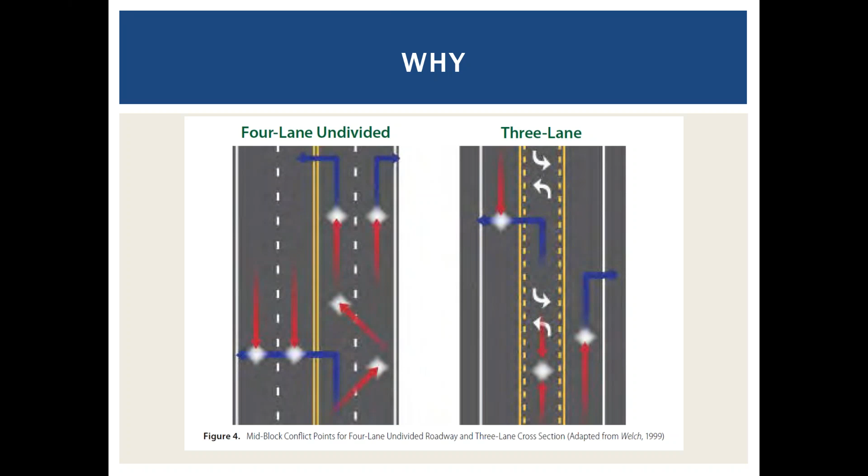The other thing about road diets from a vehicle perspective is that you have fewer conflicts at intersections — fewer conflict points, in fact twice as few, half as many as you have in the 4-lane configuration compared to the 3-lane. Before I get too far, I should note that much of the information I'm presenting today is from the November 2014 FHWA Road Diet Information Guide.

It's a new update, so if you've seen the older one, I'll be presenting some statistics, especially on collisions, that are pretty different than the prior version. Generally, the new guide has a more robust set of information about design practices and so forth. So I would recommend, if you haven't looked at that, it would be a good thing to get a copy of in your office.

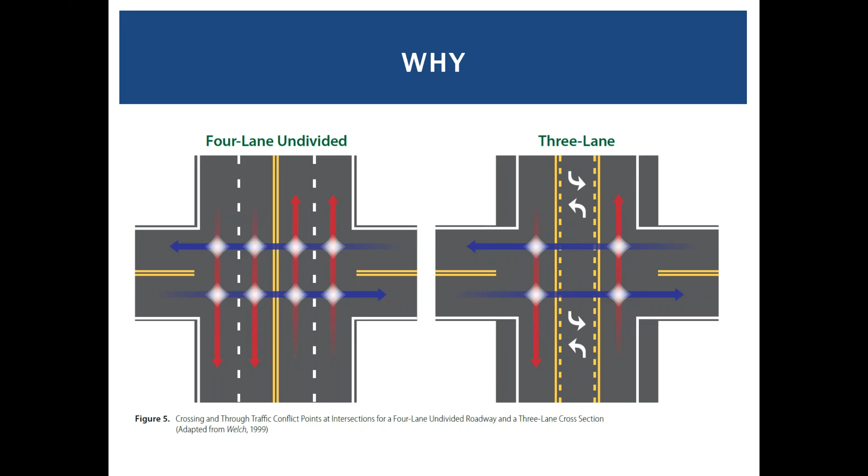Another safety consideration with road diets is being able to see how many vehicles are approaching. This is even more important when we talk about pedestrians, but the idea that if you're trying to make a left across two lanes, one vehicle may block your view of the other vehicle is important, and that is alleviated with the reduction of lanes from four to three.

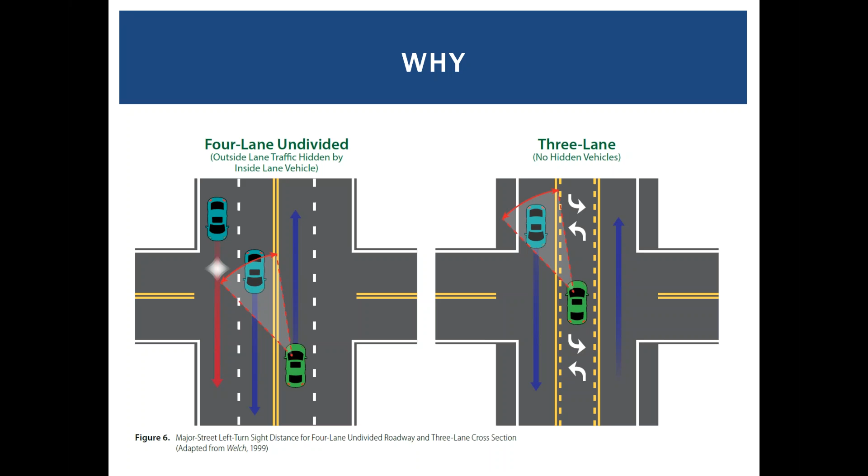From a pedestrian standpoint, I should note that most of the safety benefits you derive, at least in terms of reducing the number of collisions, are for automobiles. They're the ones that most benefit from the introduction of road diets. But pedestrians certainly do benefit as well.

One benefit is the reduction of multiple threats. As in the last slide, there was an instance where a vehicle trying to turn left is confronted with two vehicles. For pedestrians, it's even more dire because as you're crossing a street in an uncontrolled crosswalk, assuming the vehicle is supposed to yield to you, if the first vehicle yields, it often sets up a scenario where the second vehicle can't see through the first vehicle to see the pedestrian, and so it passes. Unfortunately this often results in a high-speed collision, so the risk of fatality is higher than in a typical pedestrian-vehicle collision. It's one of the most common types of collisions for pedestrians on four-lane undivided roads, and it's very much alleviated by converting from four-lane undivided to three lanes.

The other thing about introducing a three-lane road diet is that you can then introduce a median, shown in this figure. It's one of the few current crash modification factors contained in the Highway Safety Manual, which we'll talk about later, that relates to pedestrians so far, and it's pretty astounding the level of crash reduction you can get just from introducing a median refuge for pedestrians.

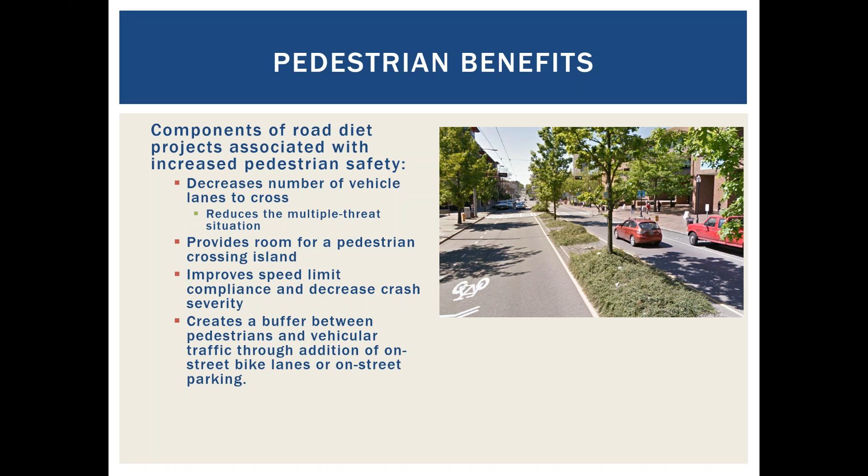Now I'll get into a case study of a specific road diet that I should divulge - I did not work on this one, but it is near and dear to my heart. It took place when I was practicing as a professional in San Francisco, but I didn't actually work on it. This is a road diet in San Francisco on a street called Valencia Street.

This was implemented in late 1998. At the time, MTA - the Municipal Transportation Agency of San Francisco, then known as the Department of Parking and Traffic - wasn't in favor of implementing this road diet. I think at present, given the cultural change in that organization, they would be very supportive. But you have to think back to 1998 in terms of the norm and expectations around moving automobiles. Anyway, the Board of Supervisors overrode MTA and said you will implement a road diet.

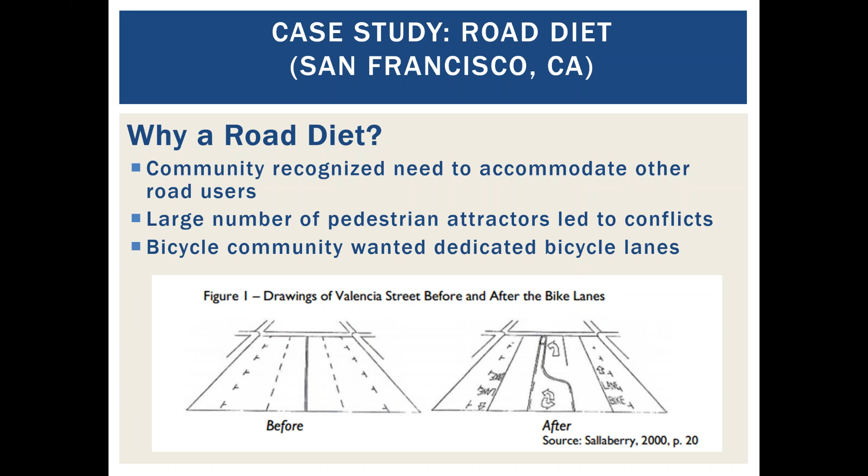So the city of San Francisco implemented a road diet on Valencia Street. A little bit about Valencia Street - when I was growing up, fairly near to it, it's in the Mission District. It was a tough district with a lot of gang violence. Over the decades since, it has transformed pretty dramatically, especially Valencia Street.

So where it was a tough place in the 70s, now it's probably the most heavily ridden from a bicycle perspective corridor in the city of San Francisco, with parklets, bike corrals, cafes, coffee shops, and tons of restaurants. It's transformed tremendously. Some of that transformation was already happening prior to implementation of the road diet, and that was part of the impetus for doing it. But much of that transformation was facilitated by the road diet and the fundamental change in character that the two-phase road diet project had on the city as a whole.

It's also important to note that it's a fairly high volume street, 22,000 vehicles per day, and there was some concern that those vehicles would divert to adjacent streets. I think it's a valid concern. The other thing about Valencia Street is it's both a bus route, and even back with the implementation of the bike lanes, it had fairly heavy bike traffic. It's now got extremely heavy bike traffic. It's fairly close to Mission, which is where two BART stations are located at 16th and 24th Street in San Francisco. So as a result of that and its commercial character, it has a lot of pedestrian activity as well.

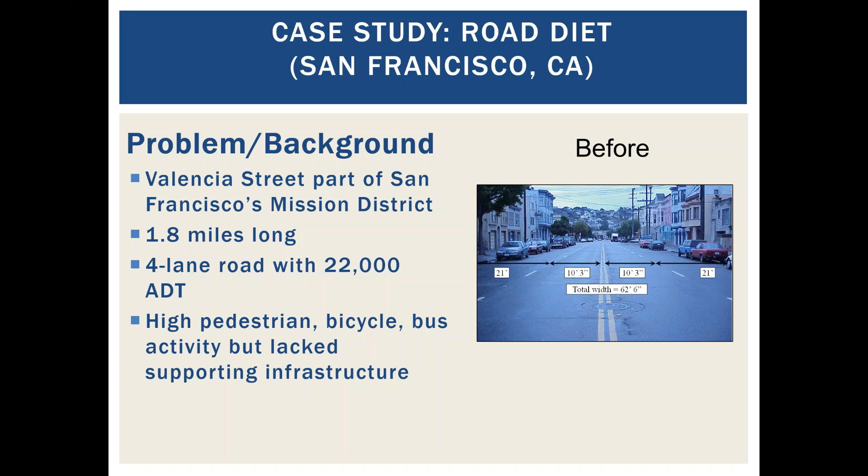Some of the key findings from Valencia Street: it was converted, actually in '99, from 4 lanes to 3. The speed limit was reposted as 25 miles an hour. Knowing MTA, I'm going to go out on a limb and say they probably didn't just automatically repost it. They probably did the road diet, did a speed survey, used that to justify reducing the speed limit, and then reposted it. They did modify the signal timing to try to get a smoother flow at 25 miles an hour. It was initially implemented as a temporary improvement. The result of that improvement, which is fairly low-cost, was $130,000 for almost 2 miles of roadway.

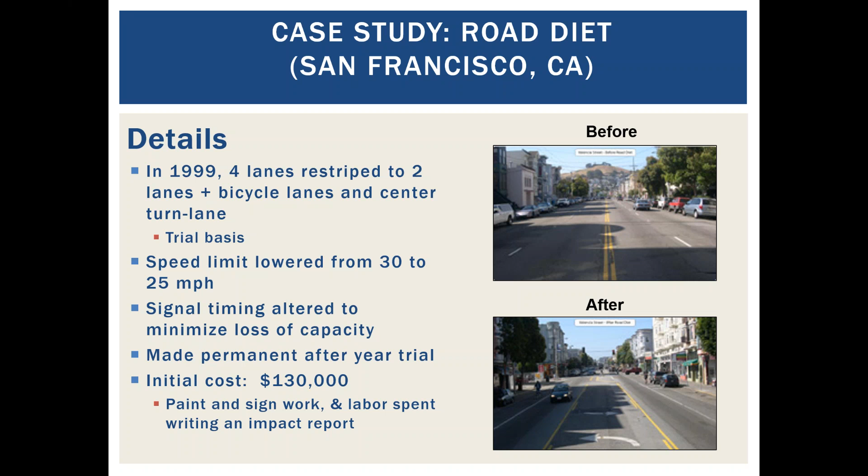The results of that improvement were eventually made permanent, mostly because some of the fears people had about traffic spilling over to adjacent streets just didn't happen, and the positive things that did happen on Valencia Street were also a big part of that. So the results showed really no change in ADT. The adjacent streets had some slight increase in traffic, but it was spread across so many parallel streets that it didn't really impact any of them. It's important to note that Valencia Street is part of a grid system. One of the real benefits of grid systems is you can spread traffic across multiple streets, so doing road diets within a grid system gives you a lot more flexibility than you might have in other street patterns where you don't have as much redundancy in the network.

It's a very significant increase in bicycle travel. Bicycle collisions also went up by about 50%, but that was outpaced by the 140% increase in the total number of people using the facility. A private citizen who was supportive of the project that Ken was running did some follow-up stated preference surveys with adjacent merchants and shoppers along the street, and found overwhelming support for it, with only a small marginal amount of people who would like to undo it. By and large, 65% were very positive, some were neutral, and a very small percent, 4%, were negative about the overall benefits of the project.

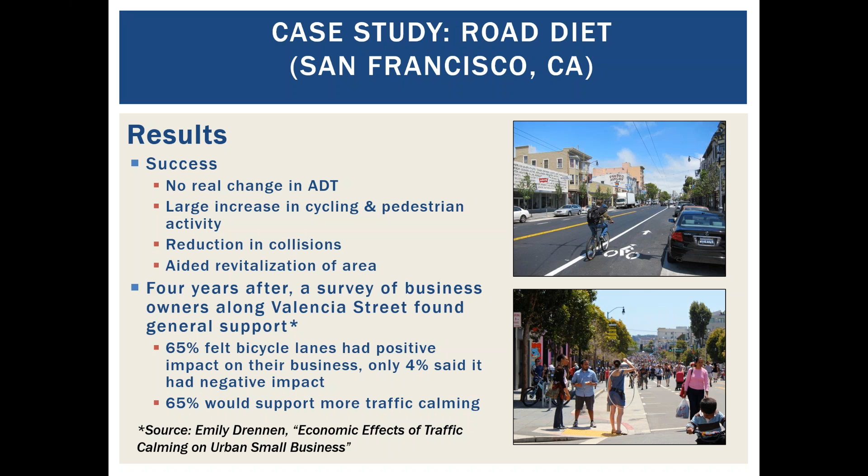As a result of that, the city went back and essentially said, well, that worked, it was really low cost, it's had a big transformative effect, what else could we do? So they looked at a host of improvements that were significantly higher in cost but also afforded additional economic benefit opportunities, and really, I think, were what was most transformative about Valencia Street. They widened the sidewalks, widened the bike lanes, implemented bike corrals and parklets, bulb-outs, increased the number of street trees and lighting, added public art. They also tried innovative stuff like the green wave, which times the signals along Valencia so that if you're going 13 miles an hour, you'll hit the green. It became a preferred route for cyclists traveling longer distances who wanted the signals in their favor. They also experimented with things like the bike bays shown on the right of this image.

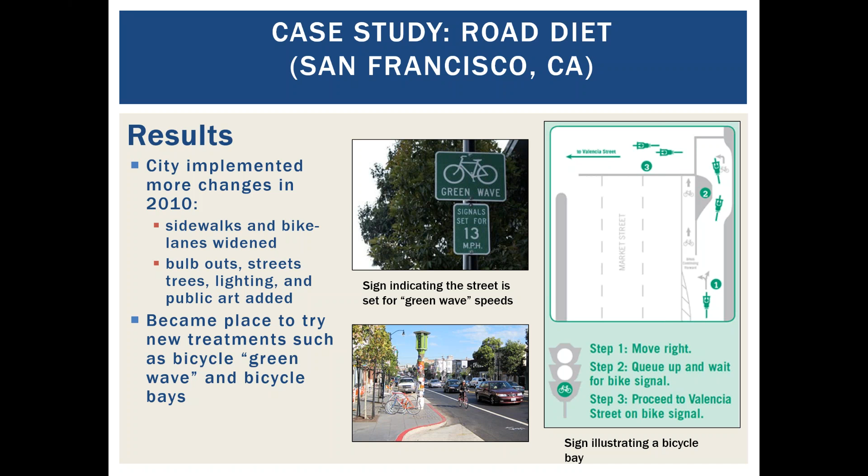So that's a successful case in San Francisco.

Now I'm going to get into some of the statistics presented on safety for road diets. It's important to note that the November 2014 edition of the road diet guide has significantly different statistics than the earlier version, partly because of a new statistical method for this type of analysis. I'm not a statistician, so I'll defer to someone else on the details, but the fundamental change has been conducting the safety analysis using the empirical Bayesian method.

In layman's terms, rather than doing a true before-after comparison, this method fits a series of collisions to a normal curve, then compares the before curve to the after curve as a better basis to estimate the overall statistical change in collisions resulting from the introduction. I'll be presenting a whole host of collision statistics in the next several slides.

It's important to note that the statistics presented up front are the more recent ones done with the empirical Bayesian method, which is considered the state of the practice. You'll see contradicting statistics in some later slides, largely because those were performed using a traditional before-after analysis.

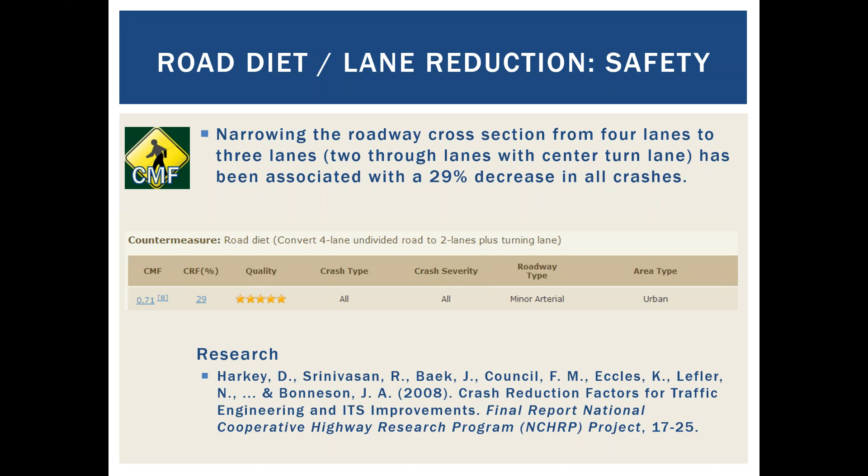The next one is an additional piece of research focused on urban areas. It has 3 stars, so not quite as statistically rigorous as the first, but not a significantly different set of results - a 37% decrease in crashes within urban areas.

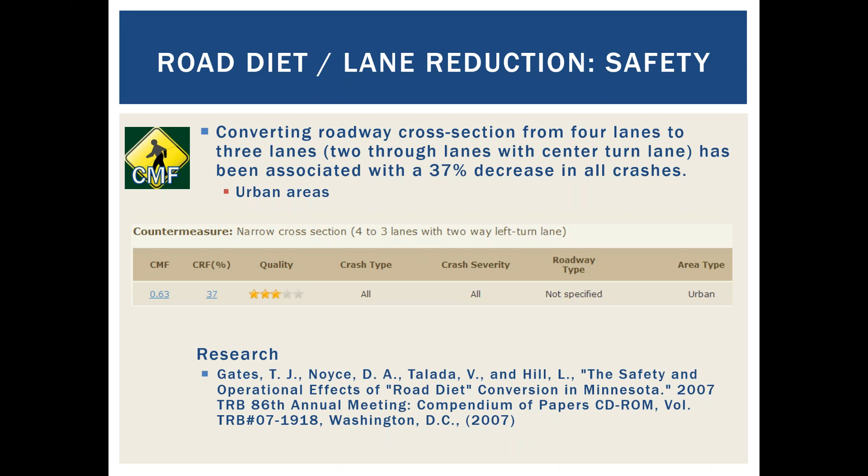The next one has a similar set of data, but for suburban areas. It's a 4-star piece of research, but you can see it's showing a pretty significantly larger decrease in collisions.

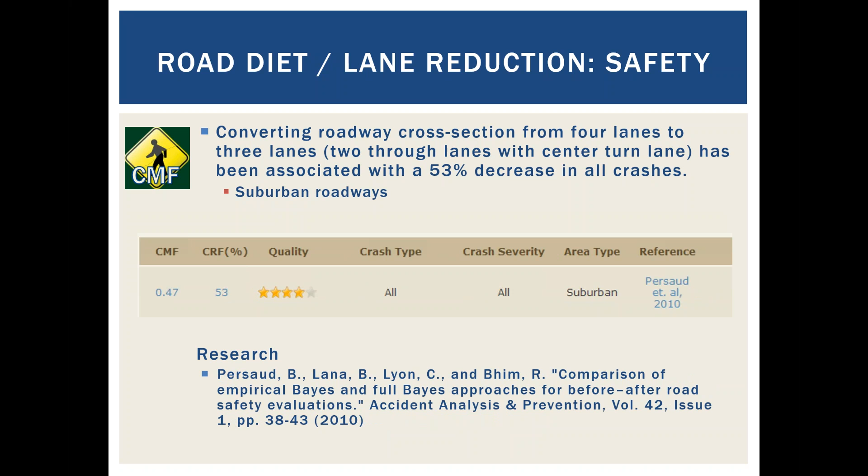I think one of the things you should look at if you're considering a road diet is to look into the details, especially of these three studies, to figure out where your particular road diet example would fit on a typology basis. You may be able to refine your estimates of what collision reductions could result from implementation of a road diet.

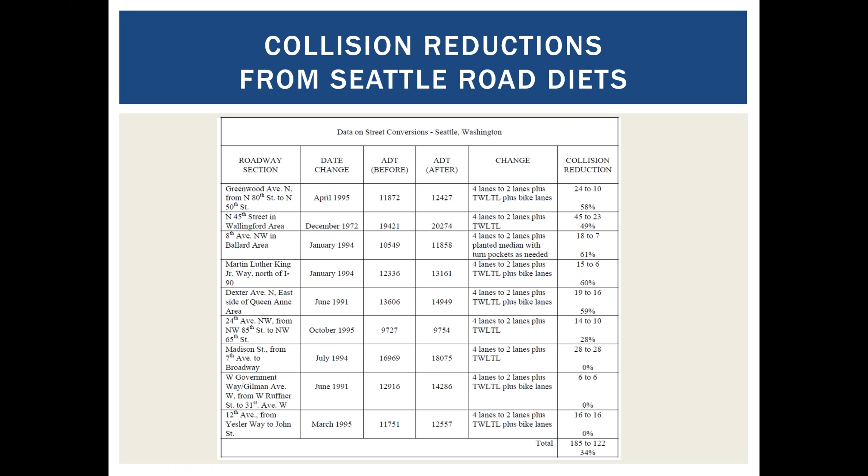On that, my own experience in the first several road diets I worked on, where we did a lot of before-after analysis, was essentially about a 50% reduction, and those were primarily in suburbs of San Francisco. So that syncs up well with my own experience doing road diets.

There are a number of considerations on when you want to do road diets. I think the biggest scenario, the most common scenario for wanting to do a road diet, really relates to safety. If you have a history of especially rear-end and side-swipe collisions for automobiles, and/or multiple threat collisions for pedestrians, then it's a good candidate for a road diet.

But it has a number of other benefits as well, including reducing speeds, which can improve the livability of a corridor, especially if you have a residential facility that you're trying to do a road diet on.

If you don't have any dedicated turn pockets, that's potentially a good reason to do it, in that you could provide those left turn pockets and receive the safety benefits associated with that. And then the other one is just about policy direction.

I want to caveat that one in particular, because throughout this presentation there are several organizations that have prepared guides for when it's practical to consider a road diet, and often those pivot directly from traffic volumes. I think that's probably a pretty good rationale for consideration, but it shouldn't necessarily be the only factor considered.

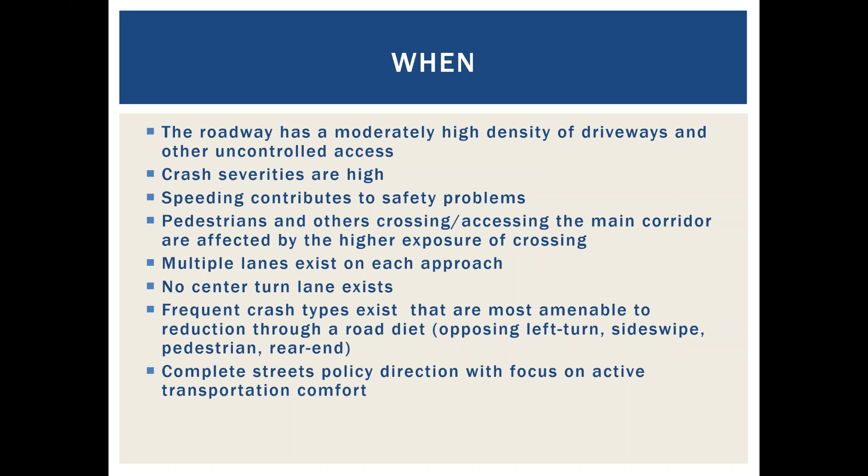I think one of the most important ones is to look at the turn percentages in particular, and we'll talk about that later on, especially as it relates to whether implementation of a road diet really does degrade the capacity of the facility.

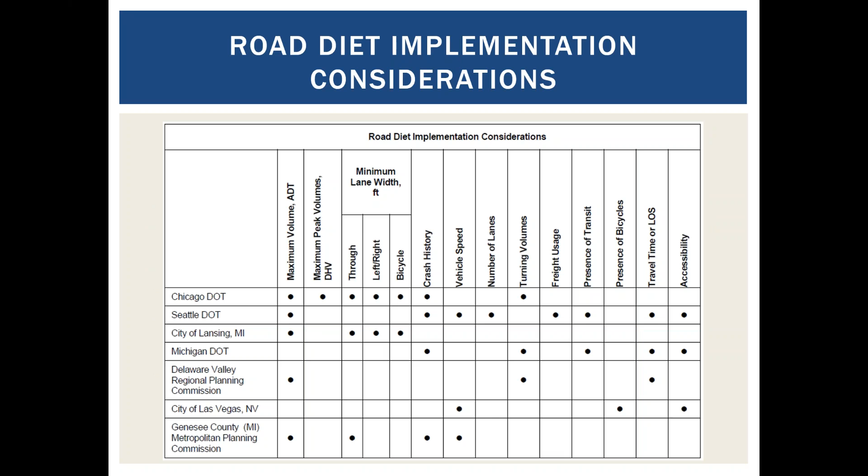So here's a case in point of a city, this is Seattle. It's very progressive and does have a guideline for implementation of road diets. You can see that if the volume of traffic exceeds 25,000 vehicles per day, according to this chart, it's not a street on which they would consider a road diet. I suspect there are policy overrides for this as well, even for them. But you can see they have a nice process in place for below that.

If it's 16,000 vehicles per day or greater, they would do a full corridor analysis to really understand the implications of the road diet, not just from an individual or isolated intersection perspective, but from the travel time perspective along a longer corridor. If it's between 10 and 16,000 vehicles per day, they would focus on a couple of key intersections, which is generally what we have done, focusing on those intersections that are most congested and analyzing the impacts, and then maybe also looking at a couple of unsignalized intersections to understand how it's going to affect some of those.

And you can see if it's less than 10,000 vehicles per day in Seattle, they don't require any analysis. It's just a candidate for a road diet.

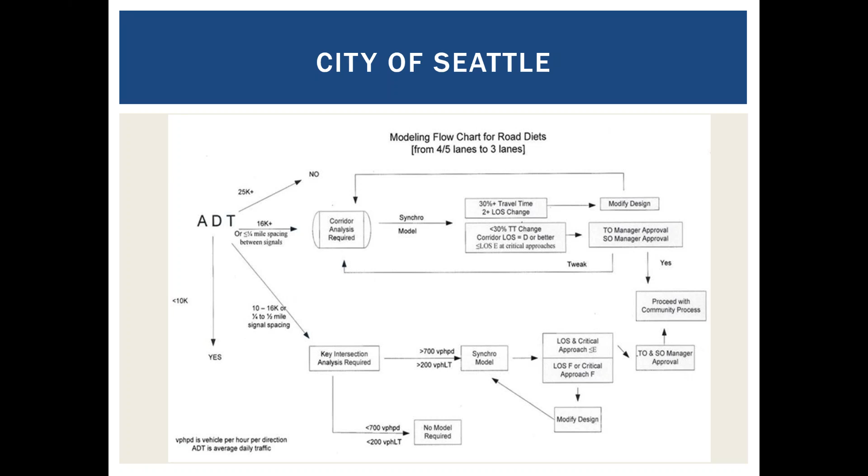Other studies have come up with other recommendations for this. The key takeaway is that there's at least one case study from the UNC Highway Safety Research Center that talks about using peak hour volumes, so 1,700 vehicles in the peak hour, which they say equates to roughly 20,000 to 24,000 vehicles per day.

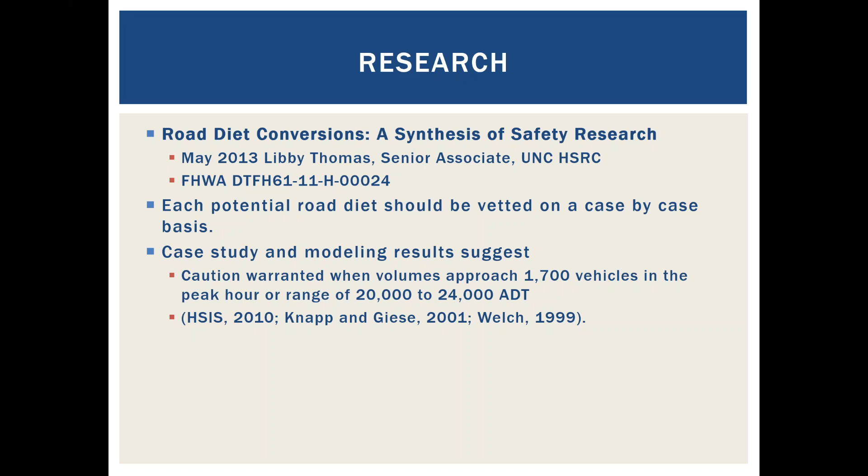There are a host of other guidelines, some more formal and some less formal. The one on the far left is actually written by a good friend of mine, Jennifer Rosales, who wrote this when she was with Parsons Brinckerhoff. The one in the middle is written by University of Kentucky, and the one on the right is the FHWA guide that was just republished in November 2014. I'll talk about each really quickly and highlight what's unique about them.

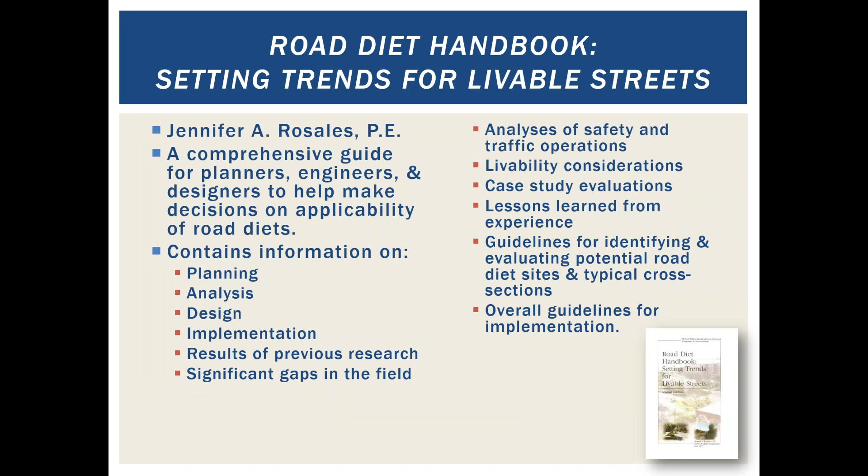First, Jennifer's research is a good guide with a number of case studies and examples throughout it. The thing that most impressed me is that it actually has a livability survey in it, a survey of residents affected by the road diet. It really demonstrates that from a livability perspective, beyond collisions and volumes, if you actually live along the corridor, road diets have pretty significant benefits to that group of citizens.

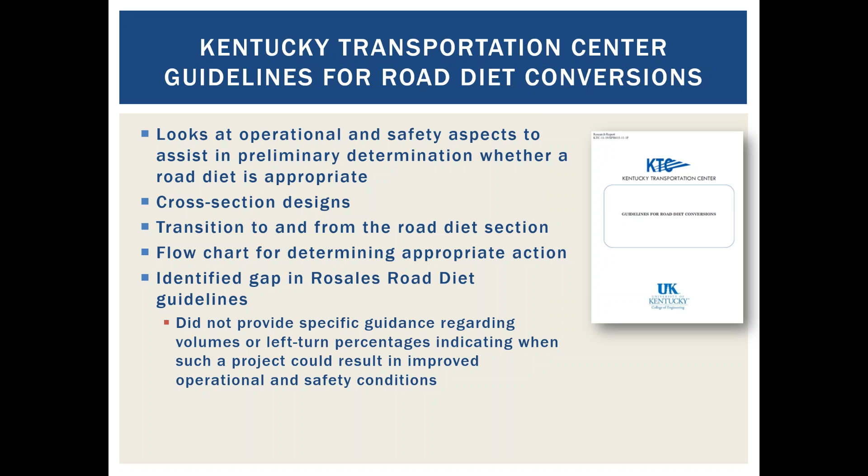Then the Kentucky one is actually pretty detailed. It has a lot of detail with respect to operations as well as safety, and it also has a series of cross-sectional case studies identified throughout it.

In terms of operations, they look at a critical lane volume method, which some of you may remember as being the old planning method in the Highway Capacity Manual. It essentially looks at what movements are conflicting with one another at a signalized intersection and quantifies those. A good example would be a northbound through and a southbound left. If those two are not moving during the same signal phase, you would add up the number of vehicles served on each to get essentially a critical lane volume planning-level calculation of whether there is sufficient capacity to accommodate, in this case, a road diet.

They looked at a number of different scenarios with different signal phasings, whether two-phase, three-phase, or more than three-phase, and found there's not very significant operational change as a result of road diets. Essentially, however the intersection operated before, if it was congested before, it's probably congested after; if it wasn't congested before, it's probably not congested after.

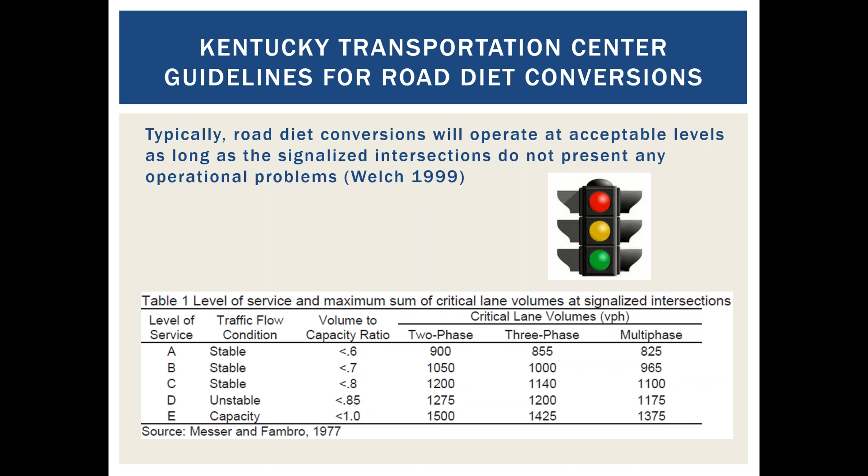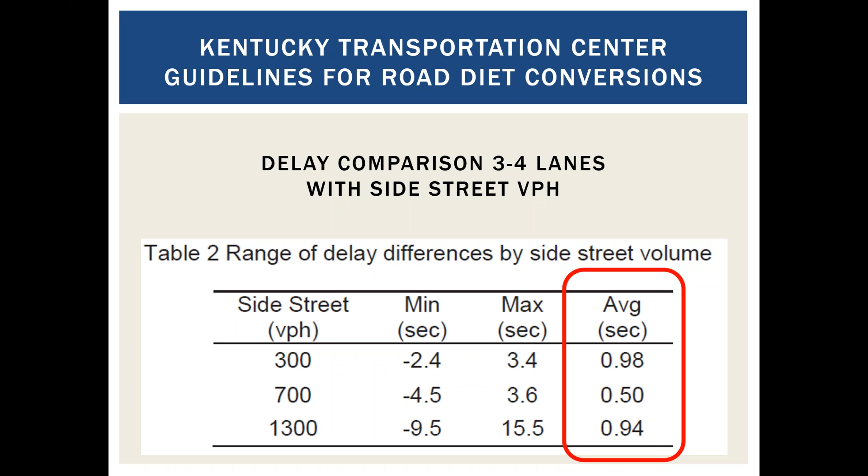They also looked at unsignalized intersections and found, somewhat counterintuitively, that the side street volume delays were even less. My own experience with road diets, especially on the higher end of the volume range, is that because the main street has all of the traffic in one lane, it sometimes has longer queues, making it a little more difficult to get out of the side streets. So that's my own experience, but I'll assume the experience in Kentucky was based on probably lower volumes of road diet examples.

But Kentucky publishes a set of guidelines for when you might consider a road diet that relates to the volume of the Main Street and side street.

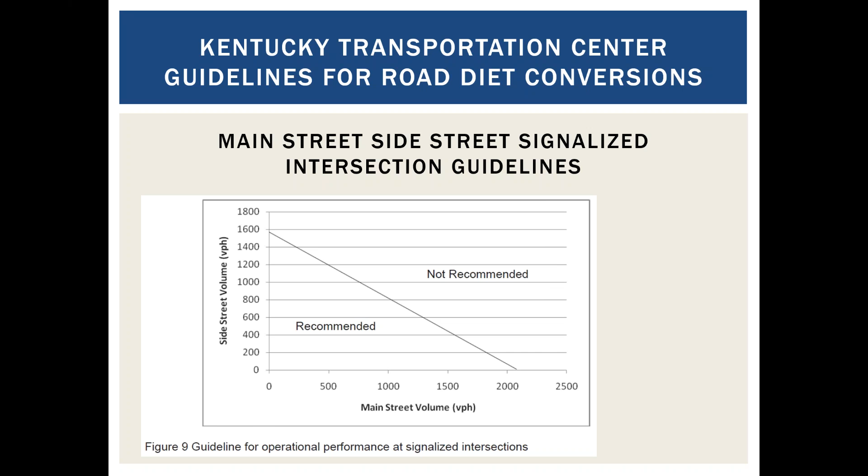And then they did also do an analysis of queues and show that there's less than a vehicle's worth of additional queue as a result of implementation of road diets.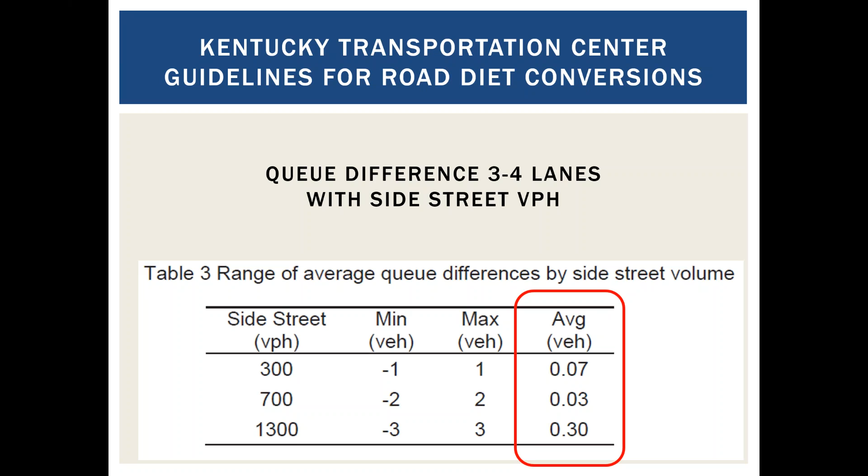And then they finally came up with this guideline for candidates. Jennifer's study is footnote 1, Kentucky is footnote 2, and the original Dan Burden and Peter Lagerwey research is footnote 3. But you can see they're all pretty much in sync with one another in terms of the range of volumes, between 20 and 23,000 vehicles per day, maybe 1,500 to 1,750 vehicles per hour. And then the case studies, you can see several of them have higher volumes than that, including some in Seattle.

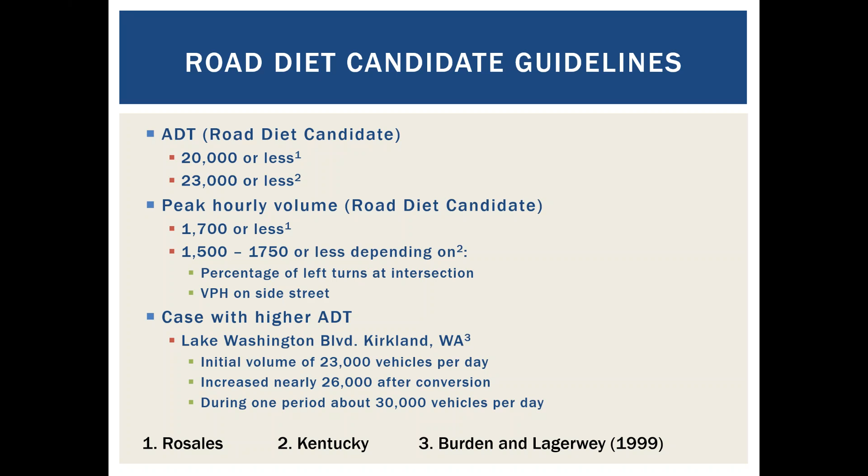Then other considerations for road diets. The primary one is buses. I'll give you an example of one road diet I worked on, Outer Mission Street in San Francisco, which is an area that has 4-lane undivided with on-street parking, heavy bus traffic, and also heavy left turn movements.

One of the considerations was that passengers on the muni buses were complaining about getting sloshed around, essentially, because there was so much double parking occurring for retail businesses that don't have off-street loading, and poor habits built up over time with light enforcement of double parking regulations along this section of Mission Street. Buses would routinely change lanes to the left to get out behind a car that had stopped to double park, then change lanes to the right to get out behind a car about to turn left at an adjacent driveway or intersection, and passengers were just getting sloshed around.

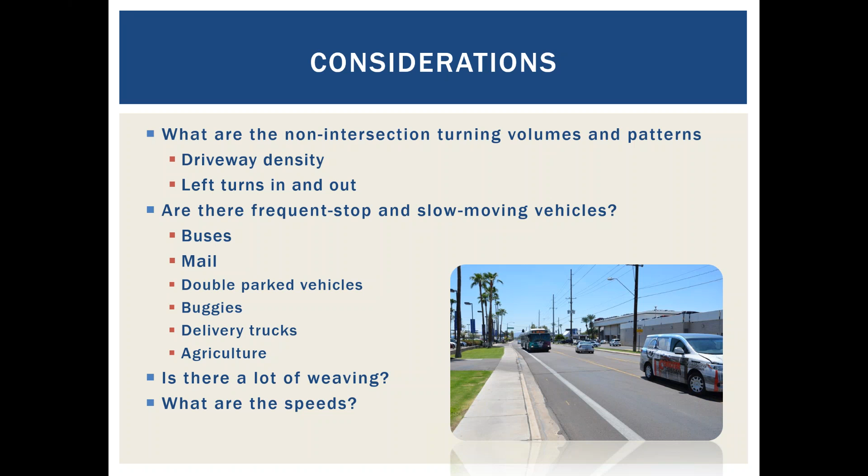So in this case, it's kind of interesting. We recommended a road diet and essentially striping out a flex space. Rather than an official bike zone, which we knew was going to get double parked in, we striped a fog line further out from the curb with the expectation that cyclists would use it, while allowing some flexibility in that space.

Other things about road diets are that they really are a wonderful addition with roundabouts. I'll give you my little spiel on roundabouts: I'm a big fan of single-lane roundabouts. You can accomplish significant safety benefits and maintain really good traffic flow through these facilities, especially if you look at it from an average vehicle delay perspective. They often perform significantly better than signalized intersections.

I do not feel the same about multi-lane roundabouts. It's really difficult to accomplish the deflection that results in appropriate speeds through roundabouts, especially in off-peak periods, with multi-lane roundabouts. So I feel like roundabouts are generally good to consider in many instances, but I'm a big fan if they're single-lane roundabouts and not nearly as big a fan if they're multi-lane roundabouts. One of the real impetuses to doing road diets is that you could do more single-lane roundabouts.

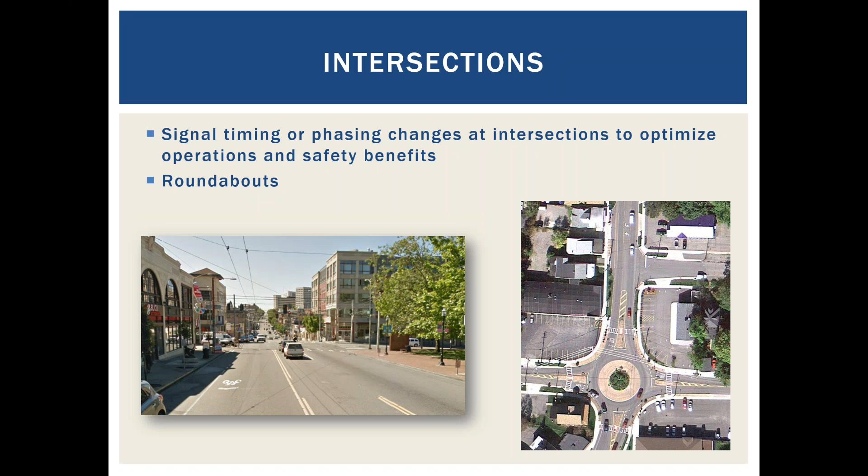Initially we had a simulation for you to look at on this slide, but given the number of viewers of this presentation, we decided to remove it because it would have been choppy for you all to see. But suffice it to say, one of the things you can do to build consensus and understand the operational implications of a road diet is simulation.

You can do that in CORSIM, which the Kentucky study actually based a lot of its results on. You can do that in VISSIM, which we've done in a number of cases, and it's particularly good if you're going to take it to the public for viewing, because VISSIM can produce some pretty high-end simulations. Or you can use a safety surrogate assessment model. There are lots of different tools you can use to simulate conditions with road diets. Obviously it's a little more expensive from a planning perspective to prepare a simulation, so you want to use it sparingly, but particularly where you're trying to build consensus, it might be a good tool for you to consider.

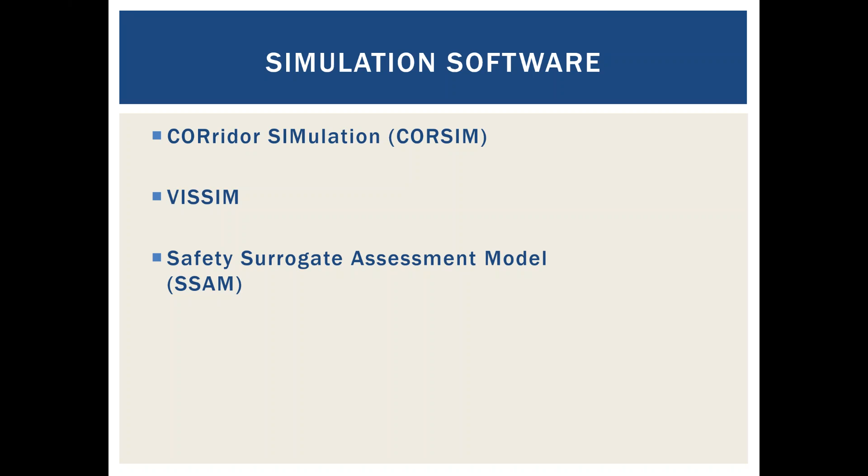Now some design considerations around road diets. Before I jump into road diets, I want to cover one more general point. I'm sure many of you have seen the research, several pieces, at least two, that relate to lane widths and speeds.

This is research by Kay Fitzpatrick with the Texas Transportation Institute, among others, that indicates lane widths have a direct effect on speeds. The general takeaway was that when lane widths were 3.3 feet greater, or about a meter, 85th percentile speeds were generally about 9.4, almost 10 miles per hour faster.

There's also other research indicating there's no safety benefit or disbenefit to reducing lanes from 12 to 11 or 10-foot lanes, no statistically significant change in collision history associated with those roadways. So there's a pretty strong sense that beyond reducing the number of lanes, there's also a strong impetus for reducing lane width, especially in urban areas.

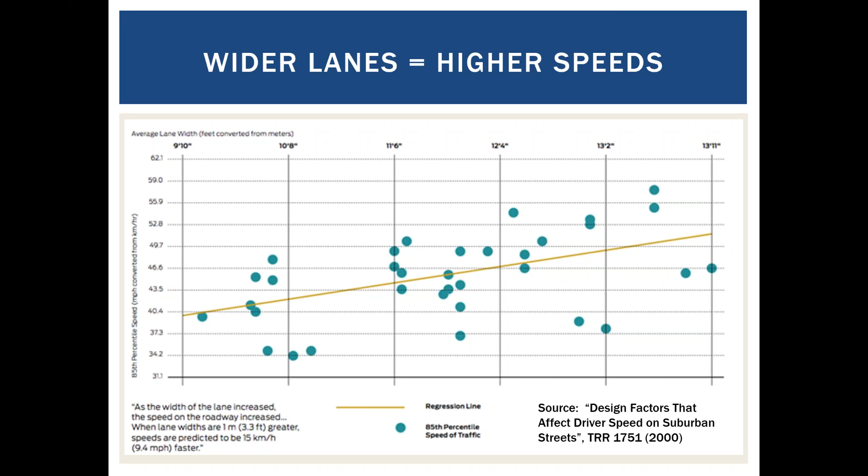One more point on that: this example shows 12-foot lanes. We're going to walk through 3 different cross-sectional examples. This one's a 48-foot cross-section, and you can see we've retained a 12-foot travel lane. If this is an urban area, we'd probably recommend 11-foot travel lanes if it has heavy bus and truck traffic, and even 10-foot lanes if it doesn't have buses and trucks.

An important note: in California, where I recently came from, the Highway Design Manual, the Bible for design facilities there, now recommends 11-foot travel lanes in urban city-town centers where speeds are less than 40 miles per hour and heavy truck and bus movements are less than 250 AADT. So there's a pretty strong movement that way.

So while this one shows 12-foot travel lanes and 6-foot bike lanes, you could easily go with narrower travel lanes and either reallocate the space to wider bike lanes or buffered bike lanes, or reallocate it to a wider median.

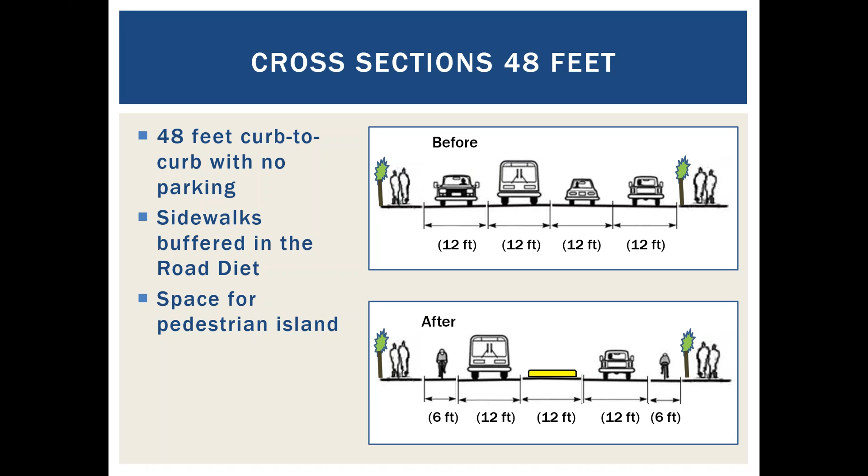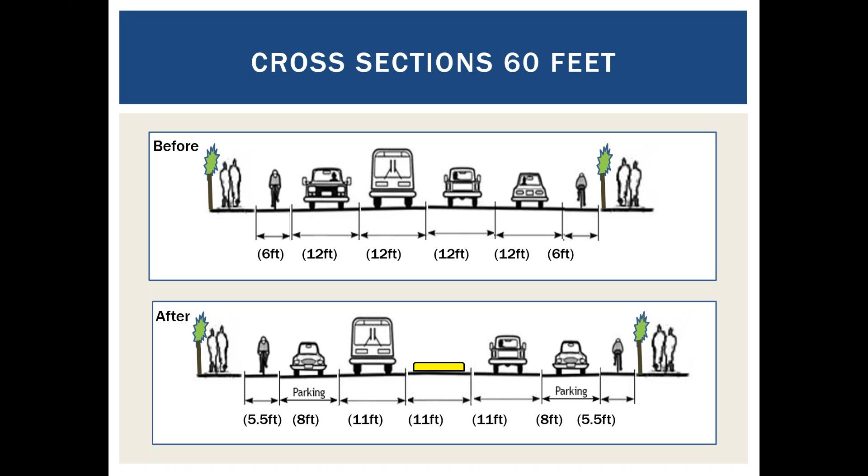I should note that I'm a big fan of cycle tracks, but I recommend you look at them beyond just a cross-sectional perspective, and look at how they work through intersections, particularly the turn conflicts across the cycle tracks.

The last cross-section example shows diagonal parking, which we'll talk about in a moment, but we'd probably recommend back-in diagonal parking. If you're going to put a bike lane adjacent to diagonal parking, it should be back-in angle parking where possible. So that's another thing you can gain: on-street parking.

One of the road diets I worked on had a bike lane for 3 miles, and within one section, the downtown commercial core of a particular street, we dropped the bike lane into the bike route for about a half-block length. That wasn't what we wanted to do, but it was enough of a change to get the merchants who wanted angled parking, more parking supply, out of the project to give them what they wanted, and we enlisted their support and had no objectors to the project. So that was one of the trade-offs we made.

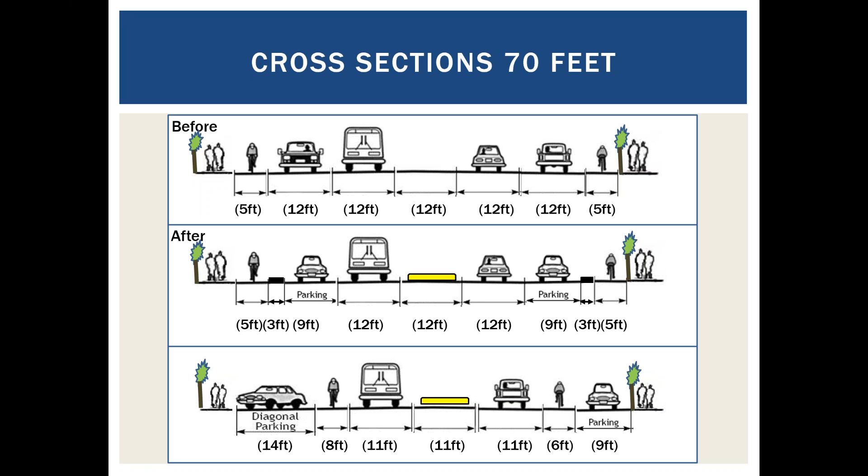But angled parking, or converting from parallel to angle, or going from zero parking to parallel parking, is another potential benefit of road diets if you're not interested in reallocating the space to bikes or pedestrians.

They previously had a shared through-left and a shared through-right. You can see with the implementation of road diets in this case, they actually got an increase in the number of lanes at this approach to the intersection as a result, because there are heavy left turns in particular. I would guess that they didn't see any degradation of the capacity of the intersection as a whole.

The other thing you can do once you have things like a protected left turn lane is you can actually have protected left turn phases at signalized intersections. So particularly where you have left turns that are in conflict with a particularly heavy pedestrian movement in the crosswalk, it allows you to consider phase separating the left turn from the pedestrian movement.

Just down Marin Avenue, the cross street here, which as I said earlier is another road diet, there is a school called Marin School where they implemented exactly that, protected left turns, and it has really been well received by the crossing guards and parents and kids who are crossing.

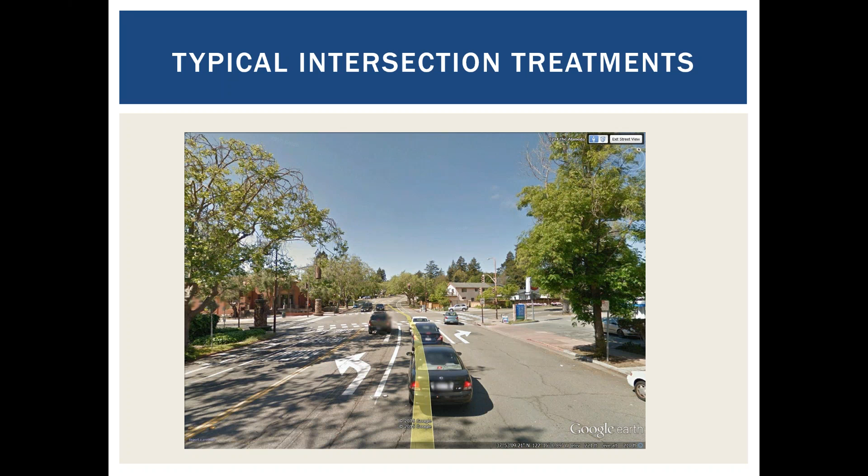Another point I want to make about road diets is opportunities to enhance crosswalks. This is one of the takeaways we've had from several of the higher volume road diets we've worked on, especially those with frequent uncontrolled intersections. If you look at the new guidance in the MUTCD, which is getting much more prescriptive about how to treat uncontrolled crosswalks, getting into things like pedestrian hybrid beacons and rapid rectangular flashing beacons, you start to look at the guidelines for when you should implement those.

In several corridors that we've looked at, we found that if we didn't do a road diet, we were going to be implementing multiple sets of intersection crosswalk enhancements, and the cost of those crosswalk enhancements was actually significantly greater than doing the road diet, even when we weren't doing an overlay concurrent with the road diet.

So it's another thing to think about, if you're going to try to improve pedestrian conditions. In my view, the MUTCD is getting more and more rigid about that, and we're all going to be required to make improvements in the not too distant future. It's still a little soft, but less soft than it used to be. So it's another thing to contrast the costs of doing the road diet change versus making all these intersection or crosswalk upgrades.

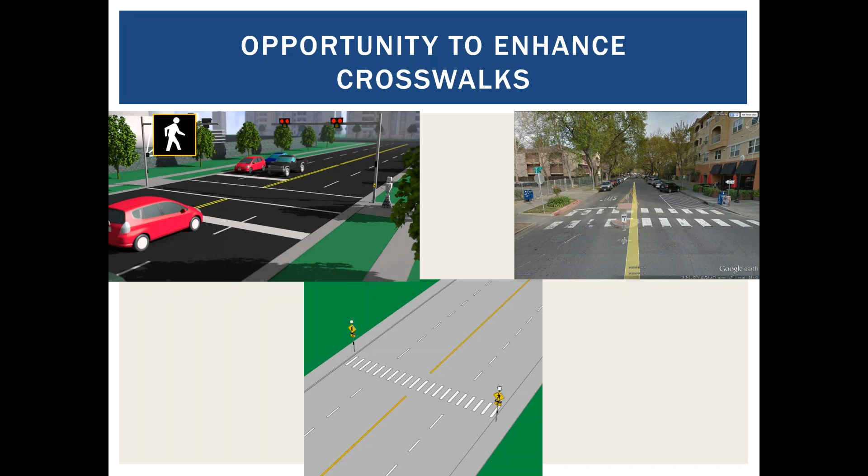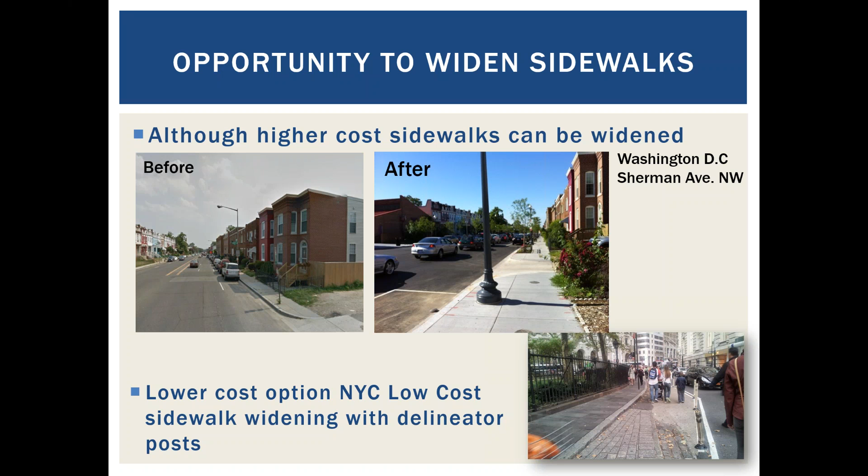Then there are also other things you can do in terms of higher costs, and I mostly want to show the bottom right of this. You can obviously widen sidewalks — that was something we talked about on Valencia Street, certainly great if you have the resources to do it. New York, as you may know, has been experimenting with soft hit posts and other tactical urbanism elements that get some of the benefit of the widened pedestrian realm without necessarily the higher costs associated with moving curbs and gutters and so forth.

And then quickly on bike features, there are a couple of different guides used out there. The AASHTO bike guide is the one that's tried and true, researched, and probably most protected from liability risk if you employ its design practices. But the more recent one, the one people are pretty excited about, is the National Association of City Transportation Officials, NACTO. It's important to note that NACTO is essentially the equivalent of AASHTO. AASHTO is the Association of State Highway and Transportation Officials; NACTO is the same, except it's an aggregation of large cities rather than state DOTs. But there are some key differences between NACTO and AASHTO.

One is that AASHTO has either got a lot of research to substantiate the views that are expressed there, or that it's just got historical practices embedded into it. NACTO has mostly well-researched treatments, but there are several treatments that are not completely researched, and for which it would be nice to have research. That's maybe the other significant difference between AASHTO and NACTO. AASHTO has pretty significant resources to conduct research, and NACTO generally has very little. It's unfortunate, because it would be great if we could get real-world research into the safety benefits of many of the treatments promoted in NACTO.

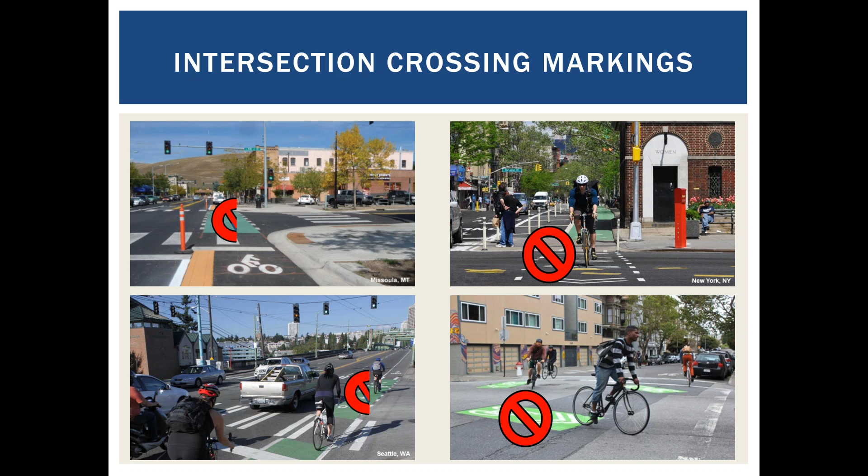This slide shows several treatments currently in NACTO, and also highlights some things that are not consistent with the MUTCD. The pictures on the left are mostly compliant with the MUTCD, but the MUTCD says that where you dash the lines on the outside, the white lines, you should also dash the green. So pretty minor changes to the design would make this compliant. The treatments on the right, what some people call elephant tracks on the top right, and the bottom is the super sharrows—this is actually through a portion of a street called the Wiggle in San Francisco—are not yet included in the AASHTO Bike Guide or AASHTO design manuals.

Two-stage turn boxes, which I actually have pretty significant concerns about, mostly because all the research I've seen shows that most riders don't use them in the way they're intended to be used. Not that they shouldn't be used, but I'd like to see more research to substantiate their benefits. They are actually going to be included in the next edition of MUTCD, or that's what all indications are. There's a placeholder for it now, and it is considered experimental. You are permitted to use it. Generally the process is to request permission to experiment, but in this case FHWA is allowing that experimentation.

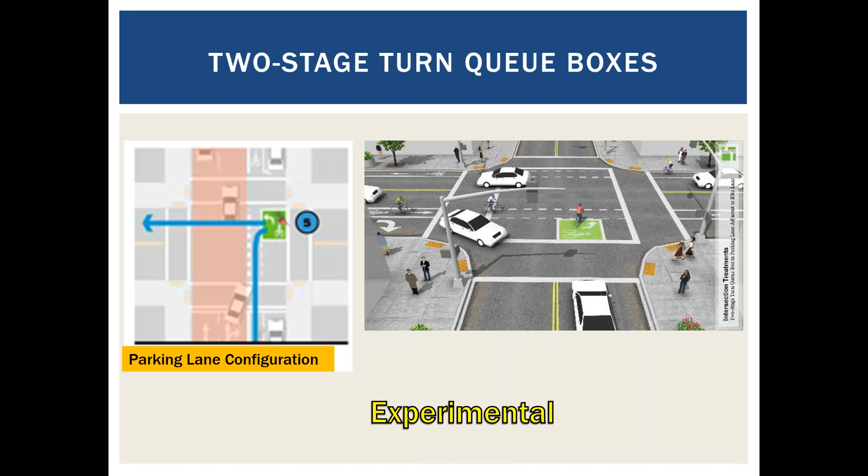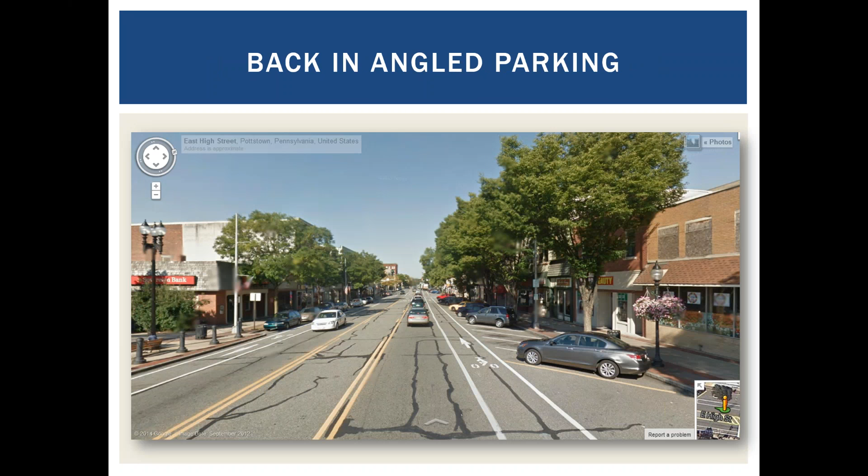I mentioned earlier I talked quickly about back-in angle parking, so let me do that now. There are some major safety benefits to this. The most significant is that the person in the car can see the cyclist approaching as you're backing out, whereas with forward angle parking that's not the scenario. Other benefits are that the person getting out of the car, especially getting a child out of the back door, doesn't have to go around the car door—they can go straight to the sidewalk. And loading over your trunk is easier.

Then some disadvantages to back-in angle parking. One is that if you have furniture zones or trees or other things, the tail end of a car tends to be longer than the front end, so you generally want to set those back further, or put in curb stops so your features don't get struck. And then, at least at present, while we still have gas-powered vehicles, the exhaust from your vehicle, especially on cold start, is going towards or onto the sidewalk.

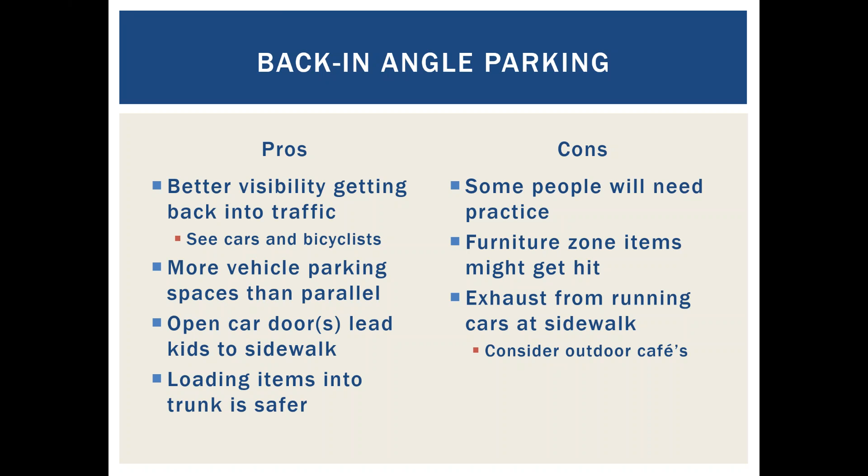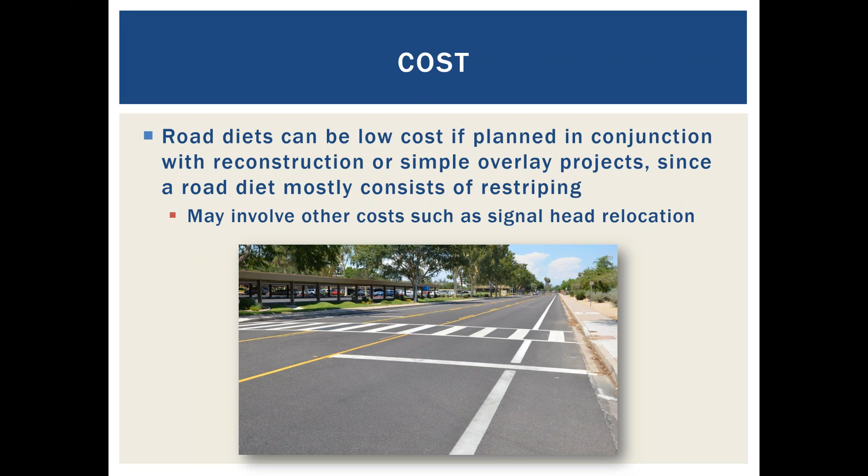A couple of last slides, one on cost and one on best practice. The best practice in terms of reducing costs is to try to do road diets as part of planned overlay projects. You still have to look at signal head modifications and potentially relocating loop detectors, but if you do it as part of an overlay, it's really just striping—pretty low cost. The best practice to take maximum advantage of that is to have a queue of the projects you're going to do as pavement overlays, and have already worked out what the benefits of the road diet might be, or whether it's a good candidate. And if you're expecting any community opposition, to have vetted that with the community.

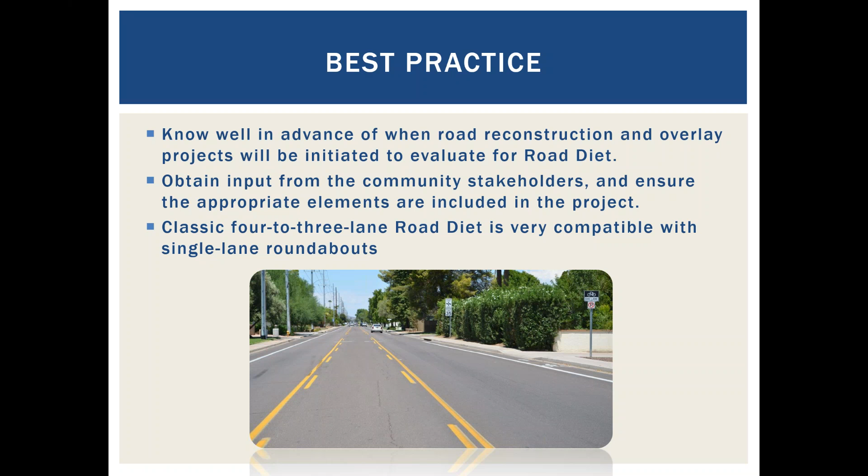So by the time you're ready to hire contractors to do the pavement overlay, or do it yourself, you've already done your homework on analysis and building community support for the project. Then real quickly, I'll run through one final case study, Nickerson Street in Seattle. I didn't work on this one either, but it's a case where they did a 4-lane to 3-lane conversion, added bike lanes, kept the posted speed limit at 30, and kept pretty wide travel lanes because it's a major truck route.

A bunch of goals were around pedestrian safety, adding a couple of crosswalks, reducing multiple threat collisions, and trying to get better compliance with the 30-mile-an-hour speed limit and overall reduction of speeds.

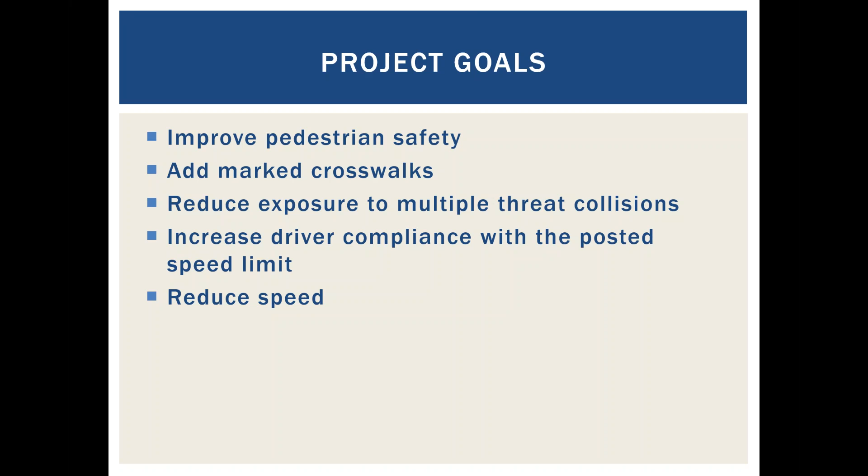What's interesting is they looked at speeds in three different ways. First, the traditional 85th percentile, which is the top box. Then the percentage of vehicles traveling over the posted speed limit, the speeders, where you can see an even more marked reduction, as much as 64%. Finally, they looked at the top-end speeders, drivers going over 10 miles an hour over the posted speed limit, in the bottom box, and you can see a very marked reduction in the number of vehicles doing that.

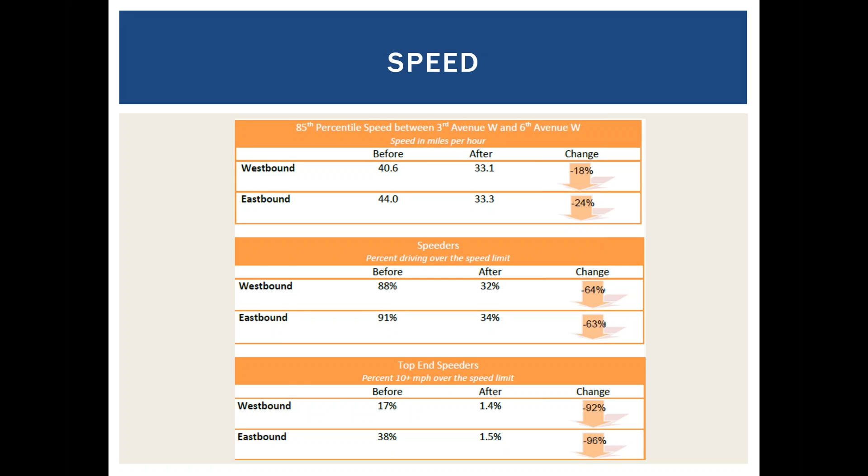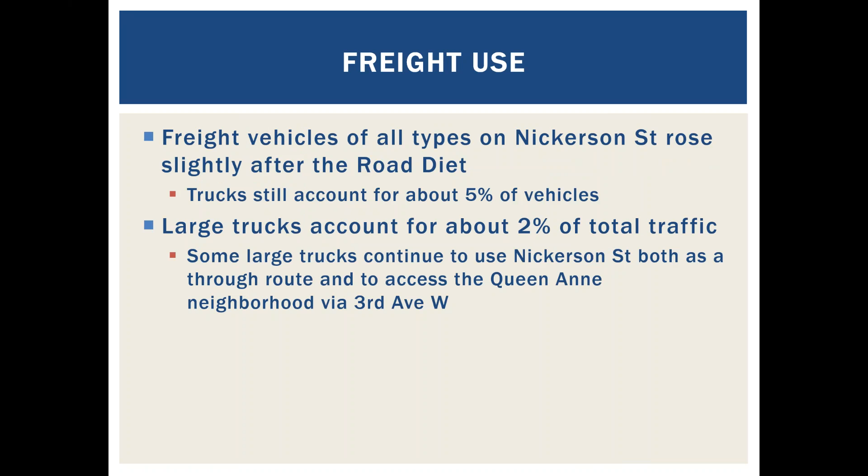So I'll end there. There are a number of resources available if you're interested in doing some additional research. So we have questions and answers.